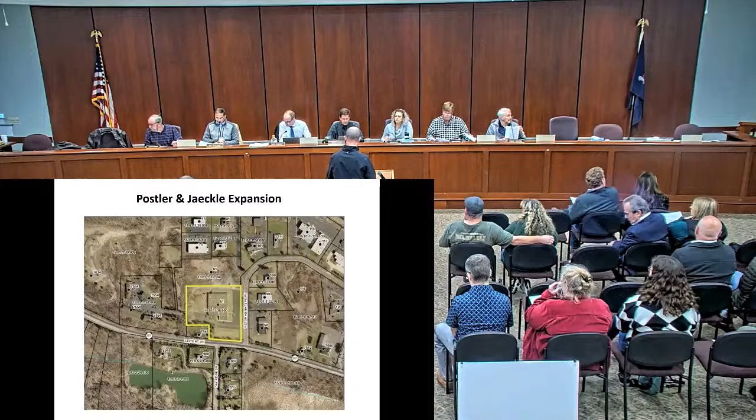So with that, the first item is Postler and Jaeckle expansion, 51 Victor Heights Parkway. Applicants are requesting approval to construct a 20,200 square foot addition to the western side of the building. Good evening. Matt Tomlinson with Marathon Engineering.

Joined by members of the developer or purchaser of the property, as well as the architecture team tonight, to answer any questions that the board may have. As mentioned, we're located at 51 Victor Heights Parkway.

There's an existing building present on the site. Interestingly, as part of the due diligence period on the property for the prospective purchaser, which is Postler and Jaeckle, for relocating some of their sheet metal and shops that are in multiple locations to this location to get it all under one roof, there was an understanding from the current owner that there was previous approvals in place for this expansion. But in research with the town, both for variances and site plan approvals, while we found some evidence of those plans having been approved in the past, there did not appear to be an approval history that went along with those plans. So we're here today requesting essentially the same approval that was shown on the previous plans, and I believe we've got a slide that shows the addition.

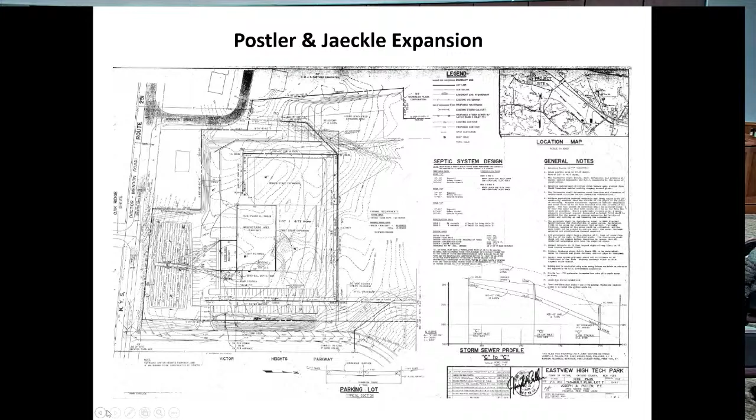So what's on the plan right there was the addition, and this is with north to the right now, sorry. So that's the west side addition that we're talking about, 20,200 square feet. The original building was here. The first addition was on the south side with a small office bump out.

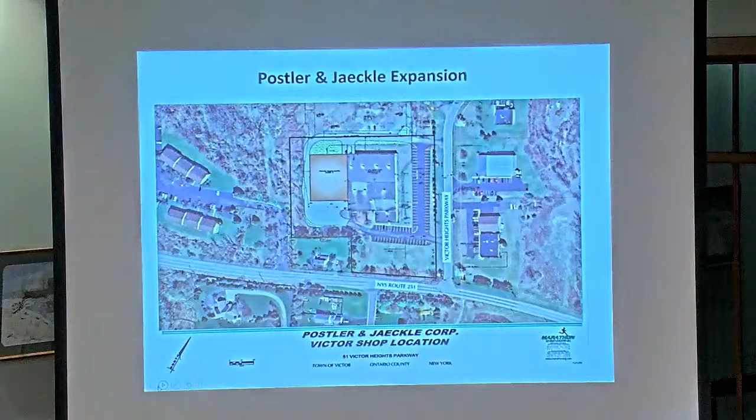If you could go to the next slide, please. Matt, the paper in front of you shows the order of the slides, so if you want, let Susie know which one.

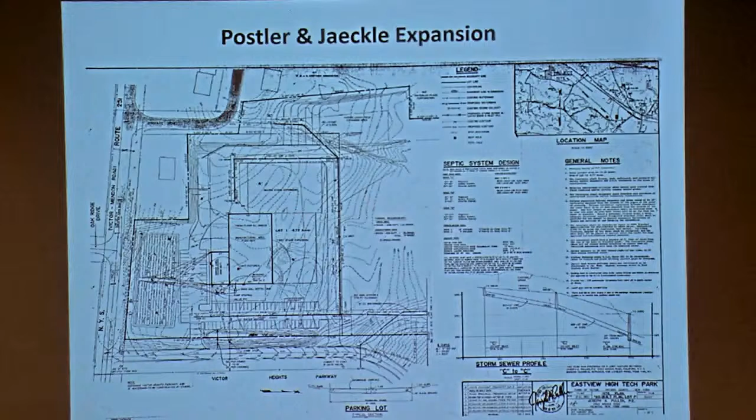Appreciate it. So this slide here is the original plan, and I believe this was dated 1991, and it shows that same, again north is to the right, the original building, the addition that was on the south with the office bump out, and then this west addition in the same location and size as what we're currently proposing.

Again, in order to kind of complete the record with the town, we were directed to make application both for site plan approval, which is what we're here for tonight, but also given the presence of residential zoning district at our southwest corner, which is only the shared property portion with the apartments immediately to our west. We also have a couple of variances. We appeared last week at the zoning board meeting to discuss those, and that is for a 100-foot buffer as well as a 100-foot setback, both of which are required within the light industrial zoning to any type of residential use.

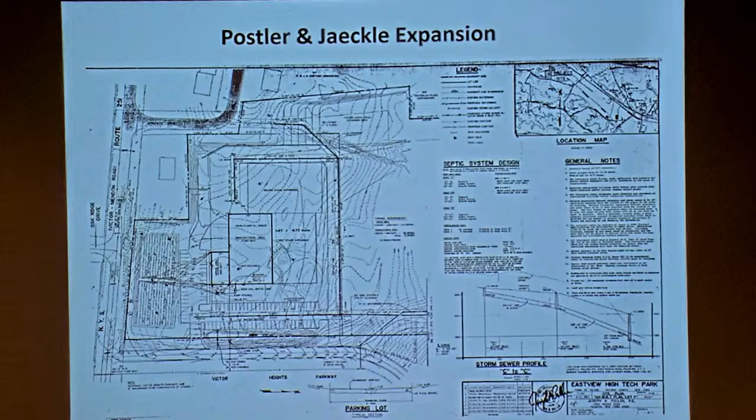Generally, all other improvements are abandonment of an on-site septic system. There's an on-site septic system along the south edge that will be abandoned along with the tank and pump system that are there now. We will connect to an existing sanitary stub that was extended to the northeast corner of the property, and then run a lateral over from our addition just to help facilitate and avoid cutting through floor slab in order to service that. There's an existing gravel loop road around the perimeter of the building, and that will be paved in accordance with town code as well for access drives within the district.

So essentially, we're looking to complete what we thought was the previously approved plan, and understand that we need to bring that up to code and get the approvals in place. We've had initial discussions with LaBella on the stormwater comment, which you'll see in the comments that we received, and are working through addressing other town comments. It's our understanding that the board cannot take action tonight because we're still waiting on Ontario County comments. That meeting's tomorrow, so we do anticipate coming back next month with comments addressed, and hopefully any questions that the board has, we can answer as well.

I believe also that the ZBA is looking at it on December 2nd, right? Correct, for their final sign-off. So that timing works out well, I think, for the board as well.

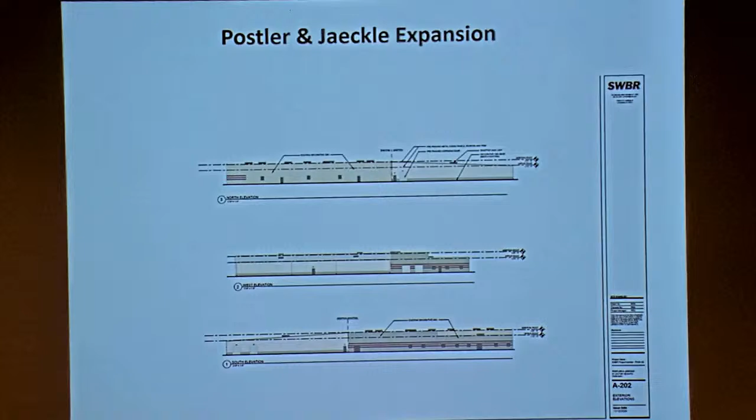We do have some slides with elevations and renderings of the building. I'd be happy to have the architect come up and explain, or we can just answer questions that the board may have, whatever your preference is. Go ahead and have the architect present, that way the public here can see as well.

Good evening, Brandel Sickler with SWBR Architects. The proposed addition will be a pre-engineered metal building addition. We will carry the existing office masonry, the decorative masonry, as a base around the building, and are proposing to use insulated metal panels for siding above that, which is consistent with many of the other buildings in this development. There will be no windows, only exit doors and several loading docks for openings. And that's about it, it's a rectangular addition, pretty simple.

Which face are we looking at with the loading dock? Which, east, north?

That is a grade level door, replacing one that is just inside that is covered up by the addition. That is the north side of the building. You're looking at orientation on your images there.

I did neglect to mention, and this was a question that the zoning board brought up, relative to the use of the building and its operations. There's some questions about noise. It is a relocation of their sheet metal shop, essentially. The addition will hold stock and have some spiral machines that operate, which are not noise generating. Any type of stamping will be as far within the building, away from the residential side, as possible. Primarily it's putting together ductwork before it ships out to their jobs.

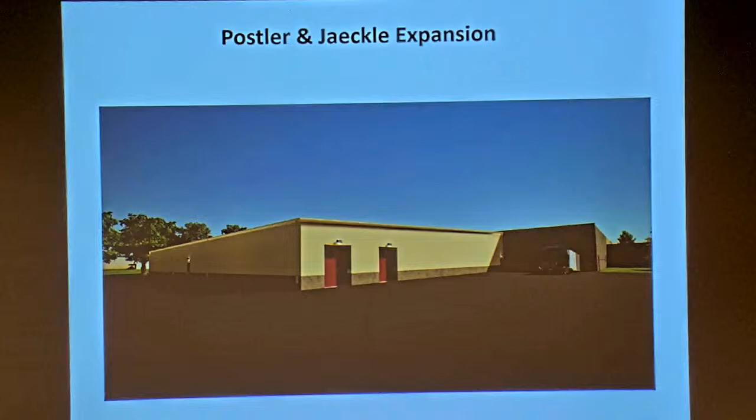Okay, great, thank you. Anything else, Matt, before I open it up? That's it. Any questions you guys have, we'd be happy to answer.

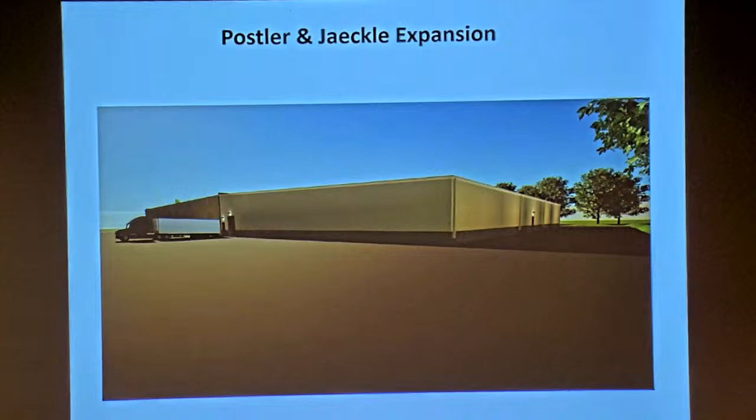Okay, Wes, from LaBella's perspective, anything about this site addition that you're concerned about, or have they answered? I don't feel like we have any showstoppers. We did release a comment letter today dated November 12th. Comment number one is about the short EAF Part 1, which lists a 17,000 square foot addition. We just note that the copy the town keeps for their record should note 20,200 square feet.

There is a somewhat steep slope on the west side of the building, I believe, very small in area, a one-on-one slope. The applicant proposes an erosion control blanket. We want them to specify the specific type of erosion control blanket, and provide some verification that the slope will maintain its stability over the long term.

It looks like we're going to work with the applicant on any stormwater management concerns for water quality treatment, as they do trigger the Irondequoit Creek watershed packet for developers' thresholds.

The landscape buffer comment we indicated in number 4: the code says whenever a permitted use in the district is located adjacent to any other district, a fully landscaped buffer shall be provided along the full length of the adjacent district. A 100-foot buffer shall be required adjacent to a residential district. So it sounds like that may be partially addressed with the Zoning Board of Appeals if they provide that variance. I'll defer to the Planning Board as to whether you want to see any additional landscaping in that area on the site plan.

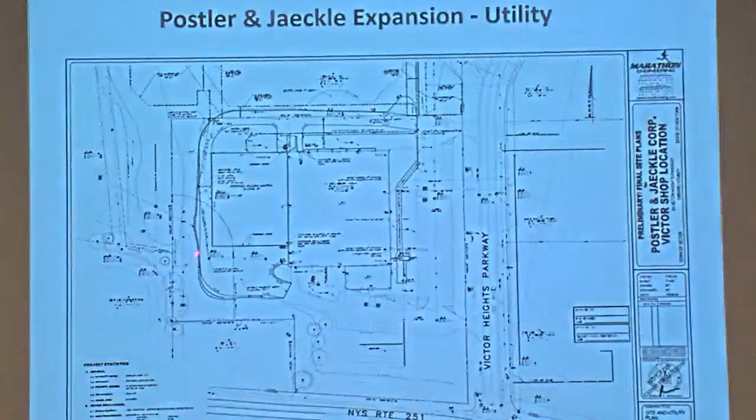Right there. I apologize that it's pretty small, but right here in this corner, that's the existing gravel edge, and we're leaving all the vegetation that exists today from there to the residential. So no change to what's out there today.

And again, there's about 12 feet in grade change with us being lower from the point on the pavement—sorry for my shaky hand—and the driveway for the residential immediately to our west. All right, thank you. Okay, now thanks.

Scott? I just had a couple of questions. What are the intended hours of operation? I'll have John speak to that. Yeah, we generally work with the field hours, 7 to 3:30. Weekends or? No, not generally.

Okay. The other question I had is I noticed on the drawing that the driveway on the north side goes onto the adjoining property. Is that correct? That's correct.

And is that going to be reconciled by some sort of easement? There's an existing cross-access easement, and I believe within the contract they're purchasing that north property as well, so it'll be common ownership. Okay, so you're not going to show an easement then?

I see a sanitary easement going through there, but you're not going to show one between the two parcels. We need to clarify whether the cross-access easement covers that, but regardless, we will have common ownership, and we will establish it if necessary. All right, that's all I have.

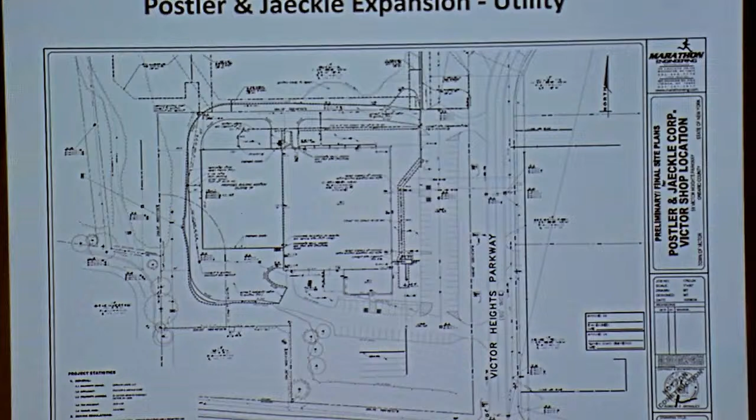Okay, this is a public hearing. I will open it up to the public if anyone is interested, with questions or comments for this application. Now's the time.

Seeing or hearing none, I'll entertain a motion to close the public hearing. I'll move. Second. Ernie seconds, Al moves, all in favor?

Aye. Okay, there's really very little left to do between now and the next meeting, so I think that makes sense. We can move on to the next application. Thank you.

James, before you get going, I'm going to give Marshall Hardy an opportunity if he wishes to go next. Would you like to go next, Marshall? Yep. I'm going to move up your application.

This is number 5, a final application. We've seen this application a number of times. I believe it's pretty straightforward. It's not a public hearing, and he's requesting approval of the subdivision of a 36.3 acre parcel into 2 lots, with the existing home located on Lot R1, 9.5 acres. Sorry, Susie, I'm a little out of order, but thank you.

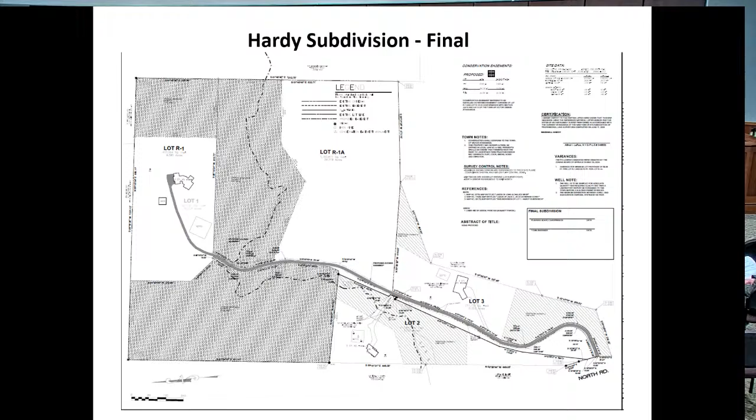Thank you. Ernie? Well, this is about the 3rd time I think we've seen this, so I have no further questions. Okay, so if there are any outstanding issues, Wes? Yeah, our November 7th letter has just 2 comments in there. The applicant has addressed them, or is working on addressing them, so we have no further comments.

Okay, thank you. As do I. I think we're pretty satisfied with all the things you've been able to do, and wish you good fortune on making your new home, and welcome that. Thank you. Okay, we do have a resolution for approval.

Go ahead and read this. For the Hardy subdivision, 7590 North Road, whereas the planning board made the following findings of fact, and there are 10 of them: resolved that the project Hardy subdivision will not have a significant impact on the environment and hereby issues a negative declaration. And be it further resolved that the planning board hereby issues a waiver to section 2915 of the town's design and construction standards to allow for a total of 4 lots to be served by a common driveway, whereas the standards would otherwise require no more than 3 lots to be served by a common driveway. Now therefore be it resolved that the final subdivision application of Marshall Hardy be approved with the following conditions.

Conditions to be addressed prior to the chairman's signature on the site plan: 1, 2, and 4 are all standard, and number 3 is that the comments in the letter dated November 7th, 2024 from Labella Associates be addressed. Ongoing conditions, numbers 1, 2, and all 4 of them are standard conditions. And be it further resolved that the planning board secretary distribute the planning board's approval letter.

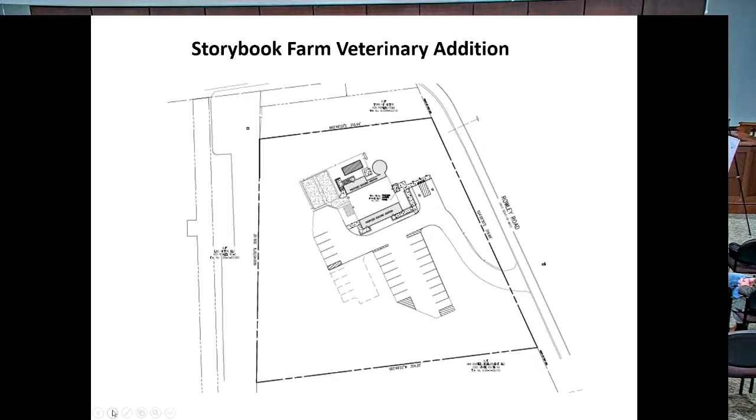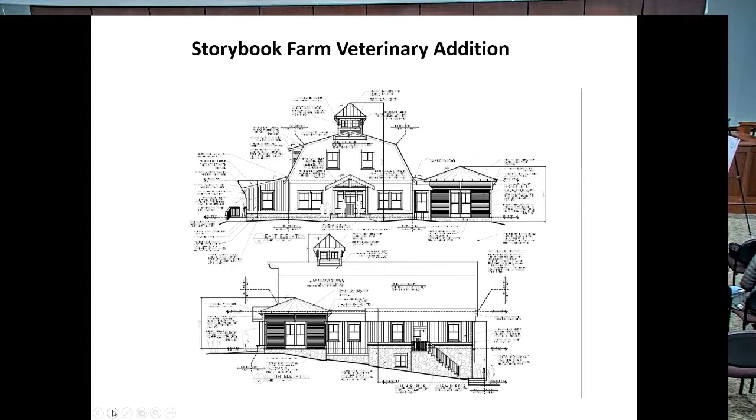We were in front of the ZBA last week for a front setback variance. One of the building additions includes a front entrance canopy that is going to basically push into the setback about 6 or 7 feet, so we're asking for like an 8 or 9% relief on that.

Same thing with what we'll call the silo feature of the addition, something that kind of fits in with the barn architecture. This also clips over the front setback by a couple feet, but a little bit less than the front entrance canopy.

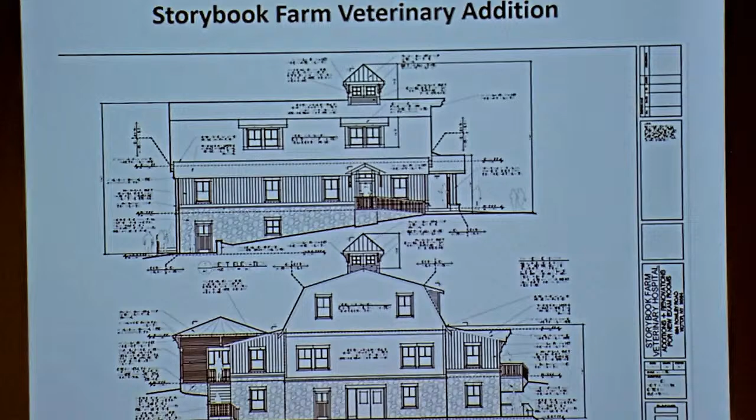So this is the parking lot side that you see when you enter, as well as the rear side that abuts some town-owned land where that little cemetery sits on the corner. On the north side of our property, there's an existing fence with some kennel structures in the rear.

We're not touching that fence. That's going to remain. We are going to be relocating one of the kennels within those limits. With the building addition, we need to push it back to get it out of the way.

You can kind of see right here, that's basically this little—darker color. If you wouldn't mind, anyone who's applying, please point to that screen because Susie takes that camera and aims it at it. So if you're using a laser.

So the fence isn't shown here, but this is the north elevation. Basically the fence comes out like this. Right now there's one of those kennel structures here, and we're just going to kick it out, but keep that fence line the same.

The rest of the kennels, we're not touching anything in the back there. The building additions are going to expand the space for visitors as well as staff. They are a very successful veterinary office, one of the few that are in Victor still, so with their growing need, they just want more space in their facility.

We did consider a separate building at one point, but this made the most sense economically for them and their business operations. Today they run about 4 exam rooms regularly, depending on the number of doctors they have there. With this addition, they're going to expand it to 6, but I think they'll still run primarily 4 regularly. The 2 extra are just going to be excess if they need it.

They're also going to expand some of the break rooms, back of house areas, surgery areas, and just make the space a little bit more amenable to the visitors and the staff.

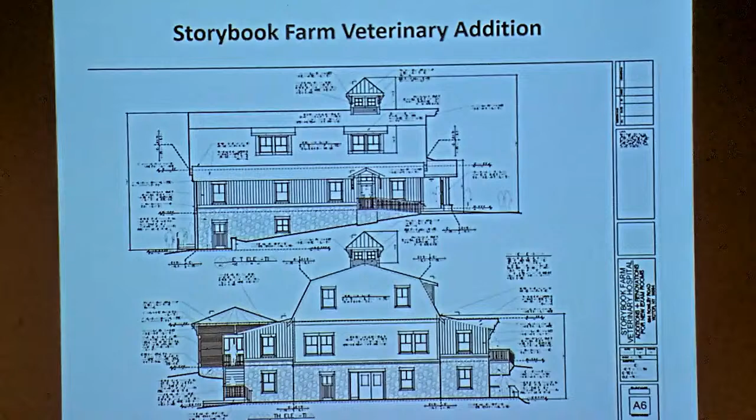The reason for this is because if you've ever been to the site today, the driveway comes in around 10% and it continues that to the parking area. Even the parking area is not ADA compliant for slopes today. So by allowing us to build the 2 parking spaces in the front here, it really keeps our saw cut and limits of disturbance to this whole parking lot very minimized.

Whereas if we were trying to force the ADA spots here, we would more or less be taking out that whole parking lot to regrade it, to bring it into compliance. So this makes a lot of sense from a functionality standpoint.

It does give us a couple extra parking spaces, especially for disabled people. It gets them right close to the front door. If they're carrying a carrier, this will make it a lot shorter of a distance and a lot more manageable with appropriate slopes and ramps and things of that nature.

We're not proposing any landscaping at this point. The only thing we're taking out with the building addition and site work is the foundation plantings. We do have intent to replace the foundation plantings. However, I think the final color and materials of the building haven't been selected, so we're waiting to do all that in conjunction.

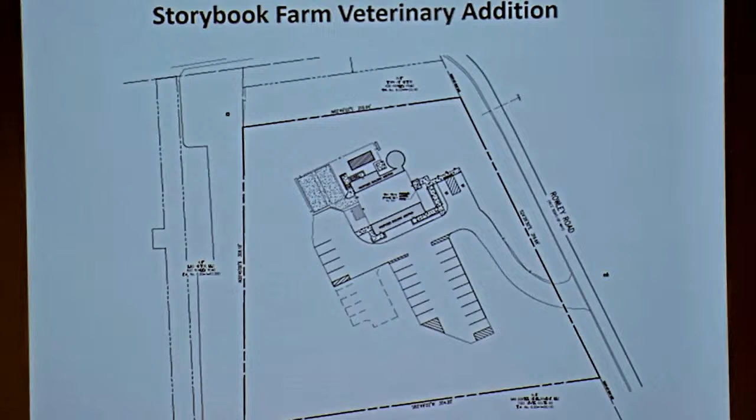So you are correct, the county has it, so we don't have that approval yet. And ZBA also on December 2nd for your setbacks, correct? So with that, I'll open up questions from the board.

Ernie, I'll start with you. Mix it up, since nobody's asked my questions yet, I'll go. Yeah, right.

Am I looking at an outdoor section here for the animals? It's all existing today — there's existing outdoor kennels today. They don't offer any kenneling services to the public. They're mainly used to house and transfer dogs based on internal shuffling. They do offer space for employees' animals though — if you bring your dog to work, they allow some of those. But in terms of kenneling, that isn't part of their business anymore.

Well, I only ask because once in a while I'm down in that area and I can hear the dogs barking. Is there some way to minimize that? It was a service they used to offer to patrons, kenneling, but it's not something they offer anymore. It's really just an amenity now.

In terms of neighbors, I don't really think there's anybody we're impacting with the location of this. I don't think there is either, but I can hear it from down by the bank below. Okay. We'll discuss it with them and see if there's any noise mitigation issues, and we'll try to nail down exactly what the full use of those kennels is to come back and explain to you guys at the next meeting.

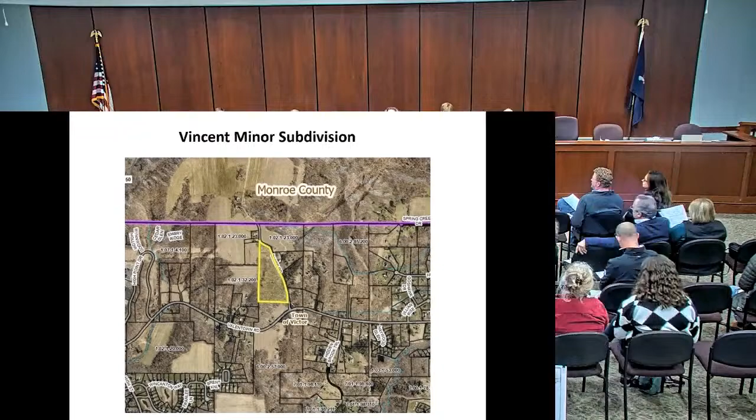Next application, the Vincent Minor subdivision. The owner is Christopher Vincent. Applicant is requesting approval to subdivide a 20.414 acre parcel into 2 lots. This is at 104 Baker Road. Lot 1 will consist of an existing home with 18.345 acres, and Lot 2 will consist of 2.069 acres.

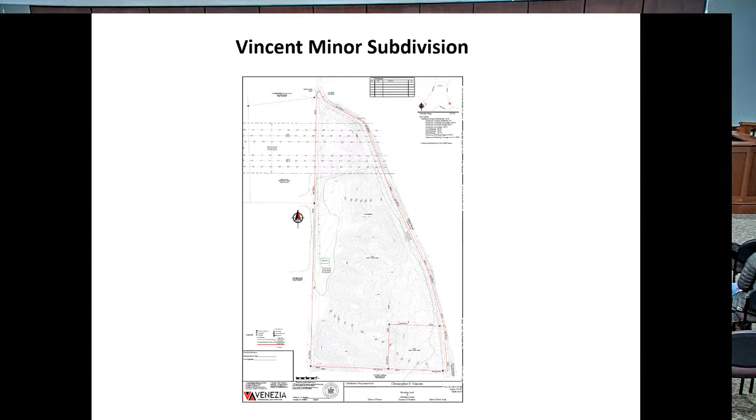Applicant here for that? Come on up. Hello, my name's Chris Vincent. I plan to sell or subdivide 2.069 acres on my current 20.414 acre lot. It would be on the bottom, the south end corner, right on Valentown Road and Baker Road where they meet. There is a laser pointer if you'd like to use it. Sure.

Right here, so here's Baker Road. Comes all the way up and turns into Thayer. And right down here, there's a cornfield, approximately 4 to 5 acres. Valentown Road goes right through it. There is a house on this lot now, up at the northerly end - that's the current house, but the driveway goes north, correct? Yep, the driveway comes up right where Baker Road and Thayer meet.

Okay, so just for orientation, for everyone's sake, there's a lot of relief here. Yeah, there's a lot of leaf up there, a lot of wind, a lot of leaf. Most of it is wooded? Yeah, right up here is another parcel that's 6.6 acre cornfields that we own as well. You can see the power lines coming up through on this side, and all of this is wooded. There's basically 3 big ridgebacks that come through there. Okay.

Questions for the board? Want to start again, Ernie? No, I don't have anything on this one. Okay, it's pretty straightforward, giving you an opportunity.

Go ahead, Scott. I guess I assume that the lot being subdivided is conforming with all the zoning requirements in terms of area, size, width, depth, all that. Yeah, as per your assumption, Labella checks code enforcement for that.

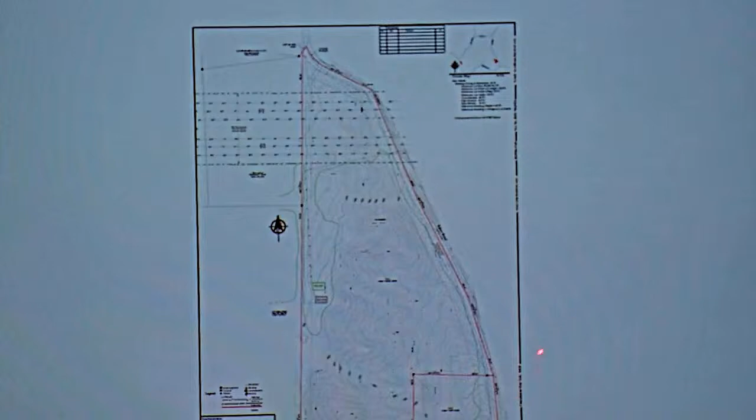Yeah, I will say there are three other owners on the other side of the road. One of the driveways is basically about right here, and then the other is right here. There's already properties on the other side of Baker Road with driveways in.

Yeah, part of the conversation is about, I don't know if there's sewer here. No. So you'd have to have, if you're going to sell it as a lot, that person is then going to have to come before the board, correct, make sure that it's a buildable lot, and prove that with engineering.

And we'll get to you in a minute, Ron. And also that the slopes work. So there's a host of things that we generally look at when we subdivide a lot, just to make sure, for your protection as much as anyone's.

Sure. So there's going to be a parcel out there that hasn't been shown to be able to be approved as a buildable lot until such time as the engineering comes through. So that'll be a risk that someone who buys that lot takes. Okay, just want to make sure that's clear.

Yeah, absolutely. So, Al, questions? Well, I think that's really the one and only concern, so. Okay, Joe? Nope. Okay, I think I've kind of said my piece. I know that Ron's here, Ron Santola, I just happen to know him professionally.

Did you have something you wanted to address, Ron? Just come up to the mic and identify yourself for the record.

First of all, when I drove into the village of Victor tonight, it brought back a lot of memories, because all those streets were designed by a firm and myself that I worked on many years ago, and it's good to see they're still in good shape. I'm a registered professional engineer, I work for Approved Engineering. Prior to that, I worked for the city of Rochester, Monroe County, and I've got numerous projects under my belt. Chris is going to be my future son-in-law, and this is my stepdaughter over here and my wife. We are looking forward to building a house in Victor, and when he offered me the opportunity to buy a couple acres, I jumped at it and said yes.

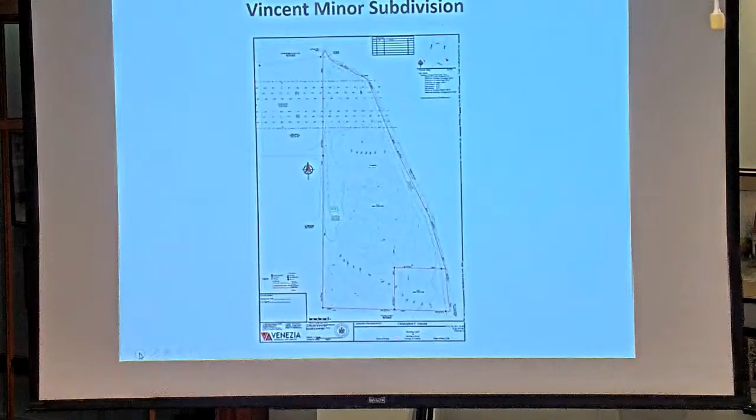If you can point to the lower right-hand corner where the red line is. The laser up there, Ron. You have a laser there for your use. There we go. Try the other screen, though. Point that one. Which one? This is the parcel that we're looking at buying right here.

The driveway is going to come right off right here, and then the driveway is probably going to come up. The house is going to be located someplace in this area. I don't want to have it up here because it's too hard to get up the top of that hill, but I want to be far enough away from Valentown Road so I don't hear the road noise. So my guess, based on the contours, I don't like the contours they got, but I want to have this...

I already put a request in for the survey, to give me a better survey of this area, and also to give me the grading of that stream, because I'm probably going to line the back of that stream with heavy riprap. I don't know if you've ever been out to Hilton, but there's a beautiful house out there with huge pieces of slab rock, and I'm trying to find out where they bought that, because I'd like to line that ditch and have it all matted so that it's not going to erode in the future. I've got pictures I can show you on my cell phone, but I want to do it right. I don't want to put a driveway up there and have it come apart in future years.

Ernie, anything else? I guess not for now. Well, obviously, your eyes are wide open when you're looking at the site, knowing what the constraints are, knowing that's going to be a risk that you're taking to not have it all engineered out before you take on these property lines, as Scott was saying. So, from my perspective, I don't see an issue other than what's been mentioned to providing the subdivision opportunity now.

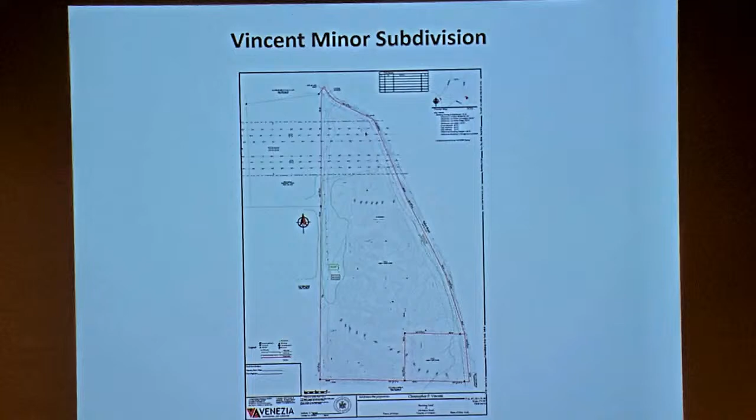But it is a public hearing, so I would like to open it up if there's anyone, residents in the area, neighbors, that have any questions for the applicant. Yes. Name and address, please. David Palmer, Valentine Road.

It's a swamp, it's wetlands. Can you, on that property? That we're talking about? There's lots of that's all wetlands. Chris, water supply is from that wetlands. Years ago, a couple of years ago, I was standing here, and Valentine Meadows development, they had to stay so many feet away from those creeks. He couldn't even go over the creek. This gentleman's going to be going over the creek.

How does that work? Is this a Blue Line Creek, Ron? Can I answer that question? Because I disagree with this assessment. Oh, hang on, we can't talk without you being in front of the microphone. So you're welcome to continue any thoughts you had, if you want Ron to answer that question. Valentine Meadows had to stay away from the creek. They couldn't even put a sluiceway, a culvert in, to move that one driveway.

And this gentleman's going to go over that creek. I don't see that. Look at how water flows on this map - east, it isn't shown, but Valentine Meadows flows west. Is that a difference?

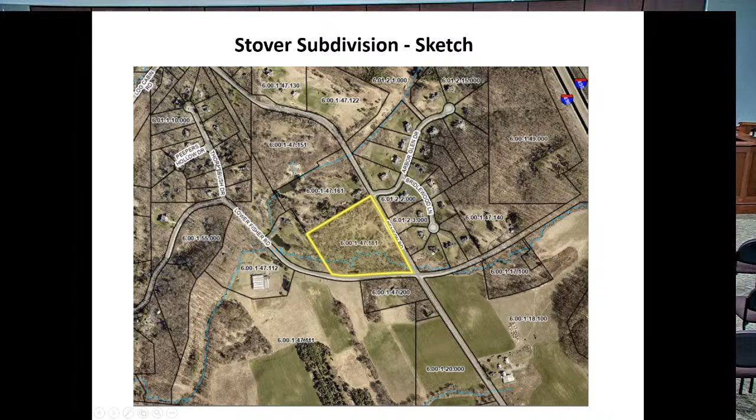Good evening. I'm Steve Schultz with MRB Group, here tonight with Todd Stover, the property owner and applicant. He intends to subdivide his 11.6 acre parcel at the northwest corner of Lower Fishers and Benson Road into 3 residential lots. The zoning of the property is limited development district, and 1 acre lots are permitted as public water is present along the east side of Benson Road.

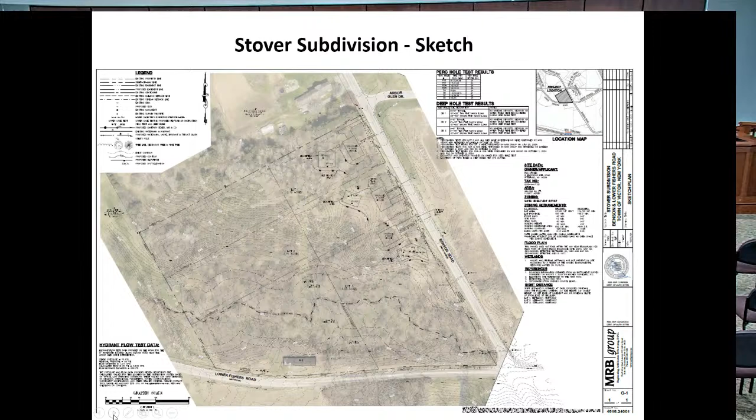So each lot will have a water service and a septic system. The areas respectively are Lot 1, 2.76 acres; Lot 2, 2.75; and Lot 3, 6.08. We've done perc tests on all the lots and deep holes, all witnessed by a representative of LaBella, and we're all within acceptable limits, ranging from probably 10 to 45 minutes or so, after running 3 or 4 times - they were all pre-soaked.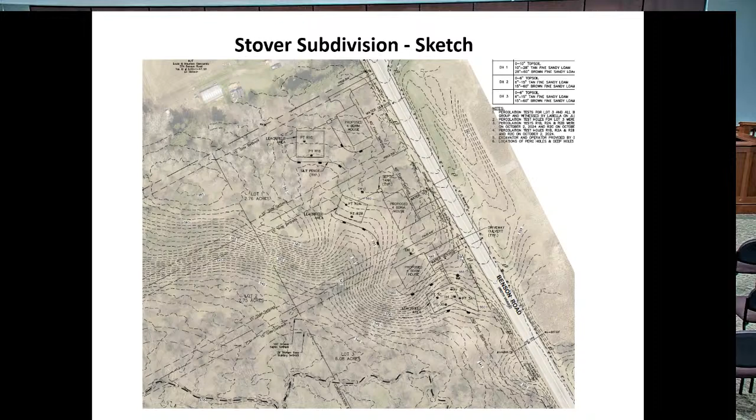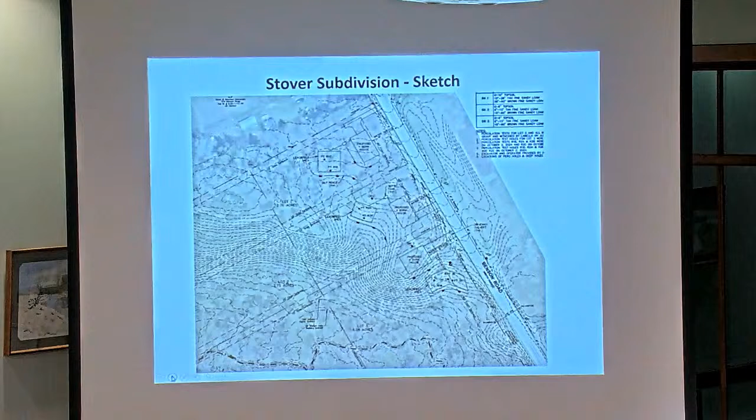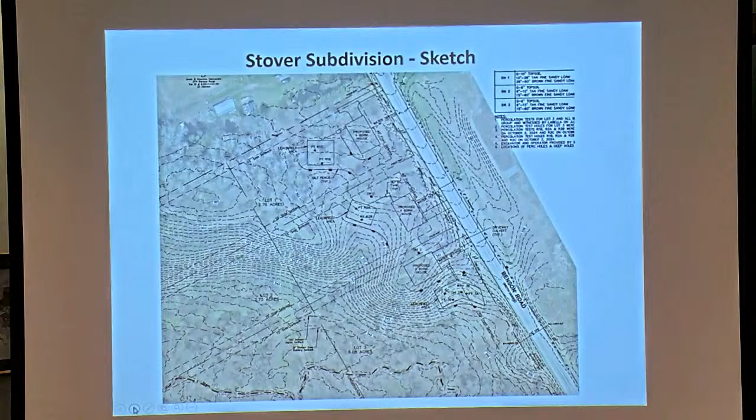So we'll use those with a 4-bedroom house, and the rough representative areas are shown on the plan as to the size of the septic system that'll be needed. We do have a conservation easement proposed on the west side of the property that makes up 50% of the property as required by code. You can't see it on this plan, but the larger lot on the south end here is 6.1 acres, and there's an existing Quonset hut type shed along Lower Fishers Road that we intend to keep on the property.

Susie, can you go backwards 1 slide? There you go, thank you. Yeah, right in here. There you go.

It has a small driveway right off of Lower Fishers, so that'll be maintained. There's a small stream that cuts through this lower lot, which is another reason why it's so large. There are setbacks associated with that, as we found out during our pre-application meeting - 75 feet for any buildings and 100 feet for septic. We're out of those limits there, which is why we created the larger lot. All the homes will be off Benson Road, all driveways off Benson Road.

What's the intent with the barn, that shed there? Is that to maintain it, retain it? Yep, he plans to keep it, and it was kind of run down. He's fixed it up nicely. It looks really, really good now, and uses it to store his small tractor and some other gardening type stuff. Okay, thanks.

We have received some conceptual comments from LaBella and town staff, and I think the one that was kind of running between all of them was the conservation easement, and to kind of eliminate the Quonset hut from consideration of the area for the easement. We have plenty of space to do that. Okay, well, on that note, Wes, any other things, or do you want to comment on this?

I'm familiar with this property because I did a concept on it for a prior owner, so this was kind of a deja vu when I looked at it. I think you have it laid out in a very similar way to how I had it laid out. I guess the question I had was concerning the conservation easement, and if the board is asking the engineer to change the configuration of the conservation easement so as to enable that building along Lower Fisher Road, or if there's something else the board wants the engineer to do.

I think it's more a question on how they're approaching the layout, because it looks like if you go along Lower Fisher's Road, there's no space other than where that shed is, to put a house. Right? Because everything else is like, I'll call it wetlands, but it's a buffer for the stream. You can't really put anything down there. You've got, well, if you take the setback, the Quonset hut is encroaching on the setback, and then the stream buffer. This whole area, that's a big wide swath, right? You can't really do anything with it.

Well, I didn't know if it was in the conservation easement or not, it seems to me the 75-foot buffer each way of the tributary, that's effectively a conservation easement. Yeah, we could have our conservation easement follow that.

The only thing kind of difficult about it is you have to monument those, that makes it a little complicated if it zigs and zags a lot. You could make some straight lines if you wanted to, I suppose, so it wouldn't truly follow exactly the 75 feet, but it could be close. You could do some chords, 2 or 3 chords, not a lot, and make it easier for everyone to enforce and/or help monitor.

We had that site once before, as I recall, remember? The one on Mountain Hill? No, zigzagging everywhere, it's crazy.

I just wasn't sure if the Quonset hut can be in it, but you just exclude the amount of area that's impervious, and as long as you have enough buffer around it, have the building plus 25 feet or something around it. I mean, we could go around it with the easement. Do they have to reconfigure the conservation easement to kind of go around that thing if it's not allowed to be in a conservation easement? Yeah, okay, yeah, we can do that.

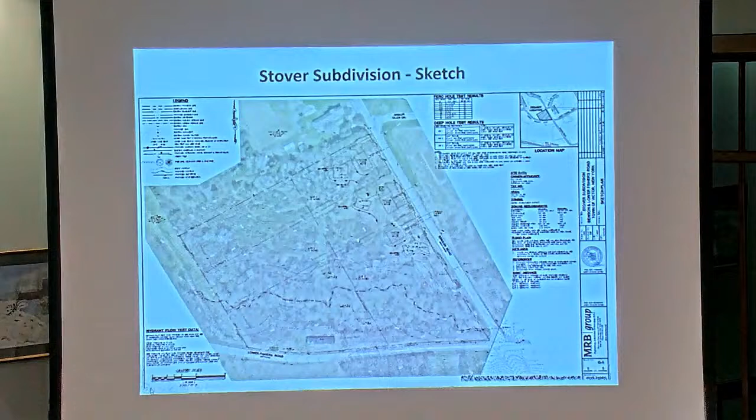That was the surveyor's question. I mean, you could do a conservation easement that starts from one corner and goes straight over there, for instance. That kind of constricts the third lot to a major piece of conservation easement, so that doesn't help you much. But you certainly have to include that Quonset hut, right?

So, I think I'm hearing we're open to, if you want to make some configuration adjustments, make some changes to make some adjustments. Yep, we can do that.

The goal with this was to keep everything up closer to Benson Road and leave this open, and your contours kind of run this curve anyway, so that's the way to do it with the conservation easement. You don't have to go diagonal, exactly, pick a couple of points and define it.

And if it's more convenient for you, the more usable land, for instance, there's a knob right here, I think, that I'm looking at on my computer, so I can see that, but right now it's partly in the conservation easement. Do you really want it in the conservation easement, or can that be usable land, or a playground set or so, who knows? Maybe you want to just take a look at it with respect to the conservation easement, what is allowed to be done in it.

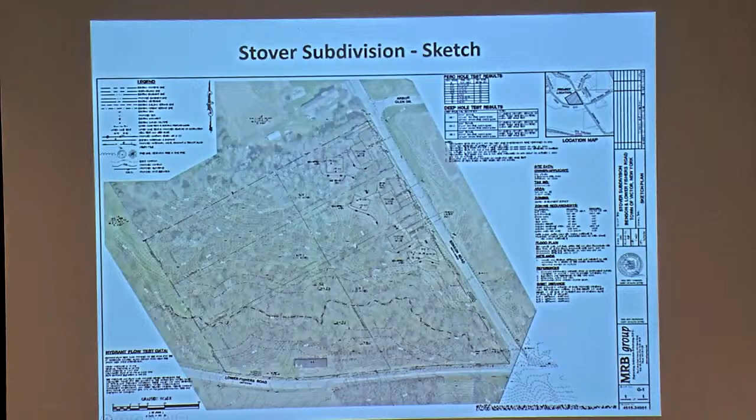It depends on the nature of the conservation easement. You can have a totally restrictive conservation easement you can't even touch, but there are conservation easements where you can mow the lawn. It's just that nothing can be built. Is it going to be something required for this subdivision that you can't touch, or is it not? Good question, what do you want?

Well, again, we can make it site-specific and define it. Have you visited the conservation board? Have they been before the conservation board? Please state your name. Sure, hi, I'm Todd Stover, I'm the property owner.

I didn't have a specific plan on that. The intent is to subdivide and basically sell, so for some of this discussion, I feel like that's the next person who's looking to buy it - some of that's their idea. Well, we do have to define the conservation easements before you're able to subdivide and sell the lot, so they know what the conservation easement limitations are.

So you certainly don't want to hem in one property in favor of another one, right? We're just trying to work with you a little bit to see if you care to have more flexibility with Lot 1 than you have right now, and there would be some trade-off there for Lot 3, but Lot 3 has got a ton of land on it. I think that what you've said is acceptable. As Steve said, this is a first pass at the idea, so there is some wiggle room on my part.

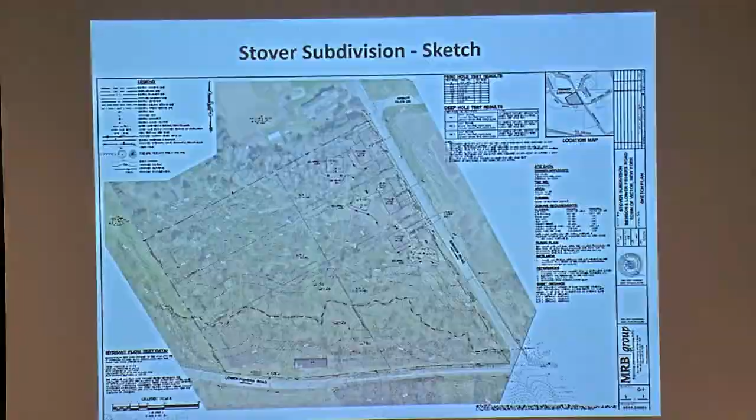So with that, I have a resolution for a complete sketch plan application. It by no means is an approval of the plan - it's basically that the application has everything we need to move forward. Whereas the planning board made the following findings of fact, there are 8 of them, now therefore be it resolved that regarding the sketch plan application of Todd Stover, major subdivision entitled Stover Subdivision, the planning board acknowledges receipt of a complete sketch plat application, and be it further resolved that the planning board secretary forward a copy of this resolution to the applicant.

Motion for approval? Move it, second. Now moves, Ernie seconds. All in favor? Aye. Carried 5-0. Okay, thank you, on to the next step. You're welcome.

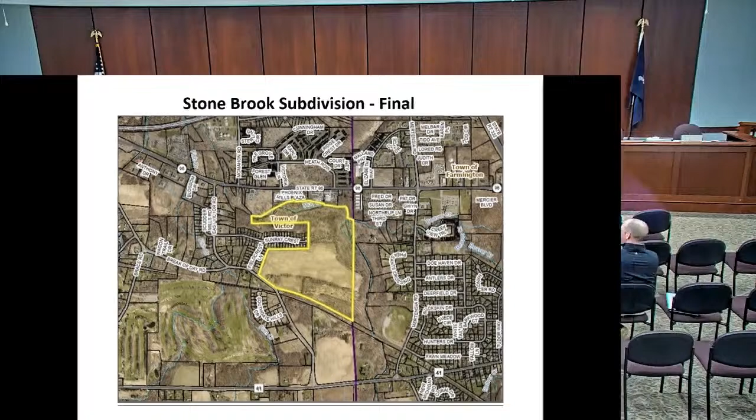Stone Brook subdivision is the next one. This is also not a public hearing. 1403 East Victor Road, owner Woodstone Custom Homes. Applicants requesting approval to create a clustered subdivision of 44 buildable lots on 100 acres in the town of Victor, with 15-plus acres in the town of Farmington for a total of 115 acres. This would be Section 1 of a 2-phase development, and the 3rd step in a 3-step process for a major subdivision. Preliminary plan was acknowledged complete September 27th, 2022.

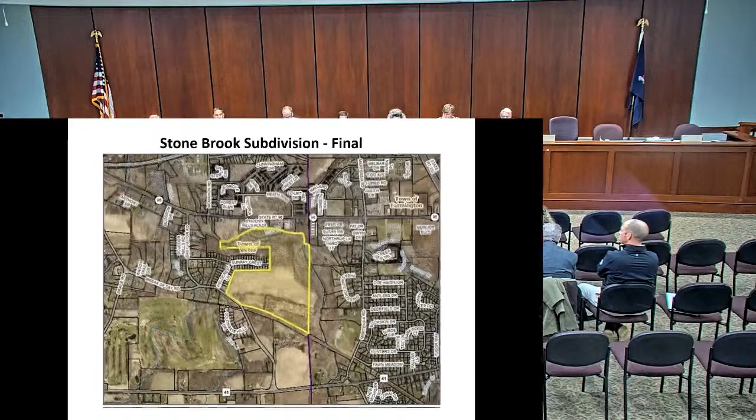So it's been a couple of years since we've seen this, but you have, and it's an interesting application, quite large. But good evening, good evening.

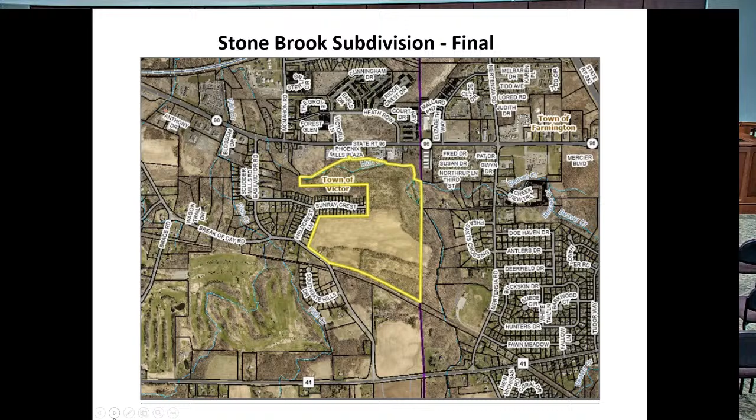Mr. Chairman, members of the board, my name is Cole Papasergi with Marathon Engineering. With me today is the development team, Jeff Smith and Tim Smith from Woodstone. We're here today requesting final Section 1 subdivision approval for Stone Brook subdivision.

As mentioned, it's been a while since you've last seen this. This was given preliminary overall approval back in 2022 as part of a Town Law 278 for 85 lots. This is a 115 acre plus or minus development, with part of it being in the town of Victor and a small portion of it being in the town of Farmington.

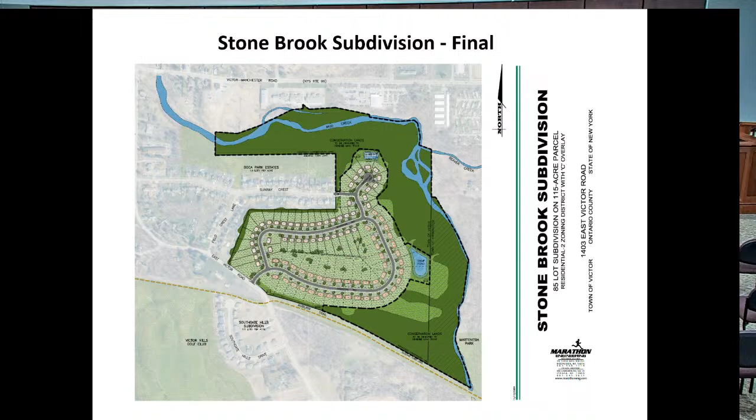Section 1 of this development will be 44 lots, and it will have access over on East Victor Road, which this is. So the whole subdivision is located east of East Victor Road and to the southwest of Mud Creek. It is also bordered by Auburn Trail to the south, and Boca Estates subdivision to the west.

It will have access off of East Victor Road and Sunray Crest, and there will be sidewalks on just one side of the roadway. As part of preliminary overall, additional sidewalk was added in a couple spots up by the north side of Sunray Crest and connecting to Fieldcrest.

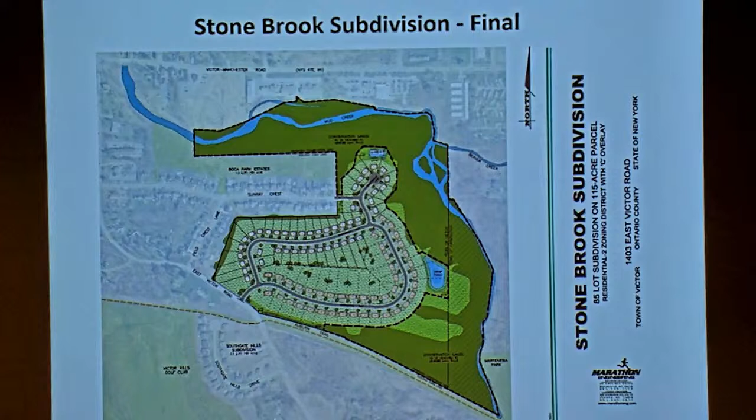I'm going to just give a brief overview of the project since it's been so long. As part of market conditions and economic factors, there's been a pause, but here before you today, ready to have this approved.

For Section 1 of Stone Brook, will just be this portion here. During preliminary overall and earlier phases of the project, it was identified that traffic was a concern by the residents and the board regarding traffic going through the subdivision. So roadway reconfiguration happened to better design the subdivision to have residents flow to East Victor Road rather than through the subdivision to the west.

Additionally, drainage was a big concern for the board at that stage, for the back units of Boca Estates. So we are designing the subdivision as a whole to mimic existing conditions. There was previously a portion of the drainage basin that would drain to Boca Estates, and we are picking up a large majority of that and draining it to our stormwater management, which will greatly reduce the drainage impacts over to that neighboring subdivision. Can you identify the stormwater management area?

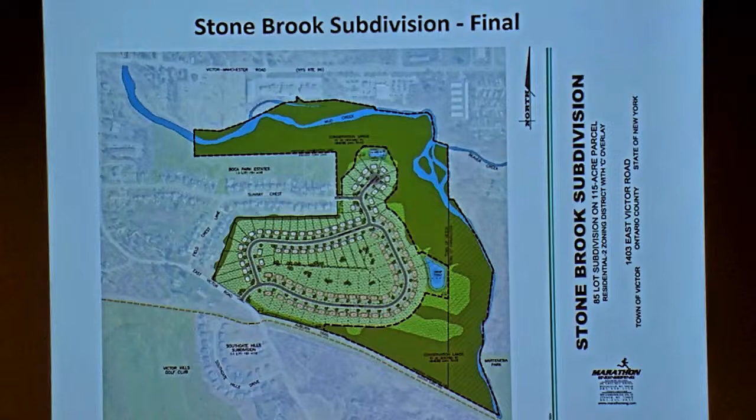I guess regarding the land trust, is that pretty much a given? You indicated there was a memo of understanding - is that the first step to some type of final agreement, transfer? How does that work? I can have Jeff talk a little bit more about that. He's been working through that process.

Good evening, Jeff Smith with Woodstone Custom Homes. Lisa was to distribute some materials from GLT. There has been a board resolution that they will accept the property. About the only terms we need to meet along the way - we've already done a phase one environmental, but they will also want the proper deed prepared. They've proposed, essentially, a memorandum of understanding that states their intentions and what their limitations would be in terms of utilization of the property. Their memorandum is principally between us and the Victor Hiking Trails, and they are soliciting the cooperation of Victor Hiking Trails to develop some trails on the property.

But they've also said in that memorandum that their acceptance of the property is not contingent upon their agreement with Victor Hiking Trails. They've reviewed it, the board's accepted it. We will have to go through all the details in order for them to accept the donation, but they have all the materials from this report. We've also provided them the details. There was a little bit of mass grading on the fringe of their property, which we've shown them, because they had to understand that it wasn't entirely - although it's 99.9% unadulterated - there's a fringe in section 2 that will be graded as part of section 1 mass grading. But they've been very supportive of the project.

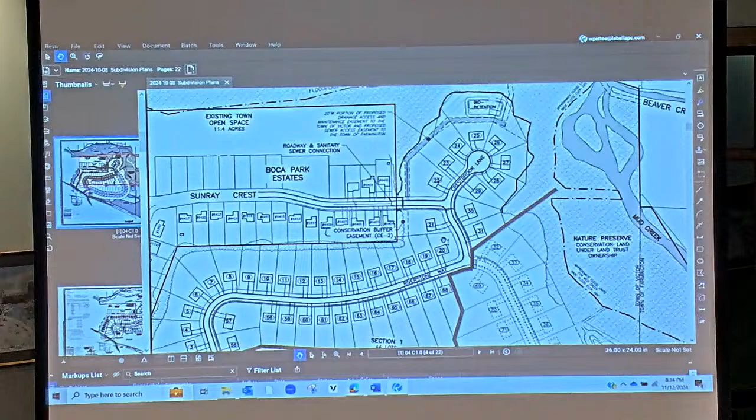Wes is going to bring it up on the screen. It'd be helpful if you could show the existing plan rather than a rendering. Oh, that might help. There we go, Wes's magic plug here. Maybe it just needs a second to recover. There we go, I'm on sheet 20 - can you zoom in on that, 4 of 22? I'll zoom in here.

So here, Sunray Crest is an existing roadway, which terminates today at this location. You can see that - that's the hammerhead turnaround Joe was asking about, right there, where the existing turnaround is for the school buses or whatnot. The existing end of the road is about in this location.

So what the applicant is proposing - currently there are sidewalks on both sides of Sunray Crest. They're proposing to extend the sidewalk on the south side all the way to the new road, Crestbrook Lane. And the north sidewalk would extend into their new development area, but then have a crosswalk at this location. I think this was agreed upon by the planning board during the preliminary subdivision phase, but our recommendation would be to carry this sidewalk all the way here and either put the crosswalk at the intersection or here.

I'm not sure what would be the best location, but I don't know that the mid-block crossing here is what we would recommend. I would discourage a mid-block crossing personally, and whether it crosses across Sunray at the intersection, or crosses over Crestbrook to the other sidewalk, maybe you don't need two crossings.

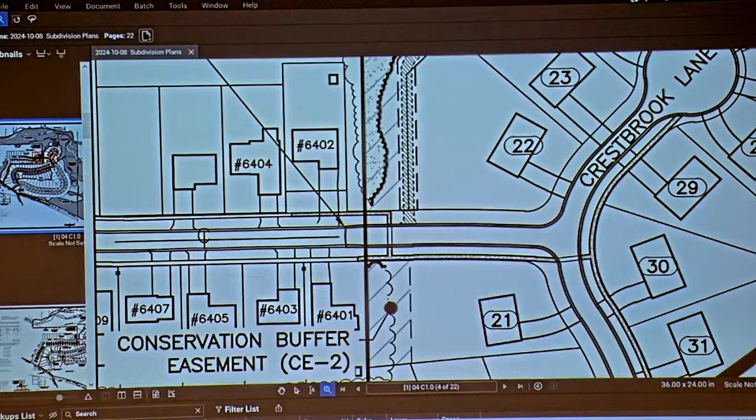So the planning board may need to decide whether you want to see an actual landscaping plan or whether you want to waive that requirement.

And then the conservation easement — I appreciate the conversation that's been had thus far about the conservation easement versus lands to be conveyed to the Genesee Land Trust. When I was looking at the subdivision plans, it was difficult for me to identify, just from the plan sheets themselves, which land was going to be conveyed to the Genesee Land Trust versus what was a proposed conservation easement to the town of Victor.

Wes, we agree, the plans are confusing, and we will make it clear. One of the confusing aspects is that on the GLT land, there wouldn't be a conservation easement, because it's a nonprofit land conservation trust, so that was clearly confusing on the plans.

As Cole said earlier, there are some very small areas, one within the stormwater management facilities, because Genesee didn't want to accept those easements and have it on their property. So those are within private ownership, and there would be conservation easements on any lots that are under private ownership. That's helpful, thank you. So that'll all be relabeled and made clear.

All right, and that takes me — I'll jump ahead in my comment letter here to number 7, the conservation easement markers. We were thinking that maybe some additional coordination might be required with the Genesee Land Trust, which gets to our fellow planning board member Joe's question about marker for lands — identifying lands so people know when they're entering the lands of the Genesee Land Trust.

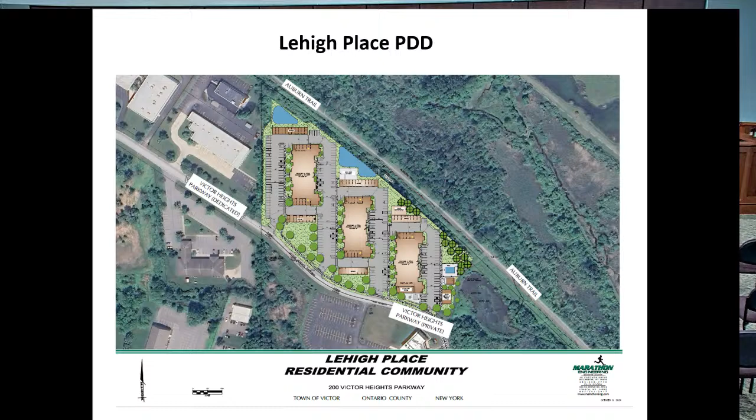I really don't have anything I'd like to point out in this updated draft. Has anybody had an opportunity to take a look at it, and do you have any questions? I had an opportunity to take a look at it, and I thought it was very well done. The two things that jumped out at me were the information you got from the school district, that they were rebuilding and running out of room. That's the first time I've seen any type of communication from the school about what we suspected, and I appreciate you including that.

And then the other part you included was that the density wasn't necessarily locked in to the 156 or whatever the magic number is. We still think that's negotiable, because I still come back to PDD being more like an HDD, a high-density development. It begs the question in my mind, why do we have multiple dwelling zoning when obviously if you're a developer, you're going to go for a PDD and try to get the most that you possibly can. But I think density is still, for me anyway, up in the air.

Still a concern, is that what you're saying? Yeah, it's a concern. Okay, Ernie? Well, Al had a comment last time about the school district's position, and I suspect that's because his wife is a teacher, and we're helping to fund a $100 million expansion. I'd like to hear what you have to say. Well, first of all, I did read Wes's draft and I'm fully supportive of what you've documented.

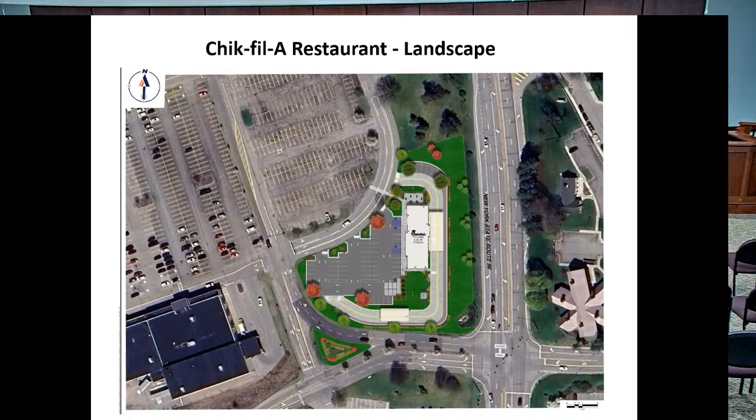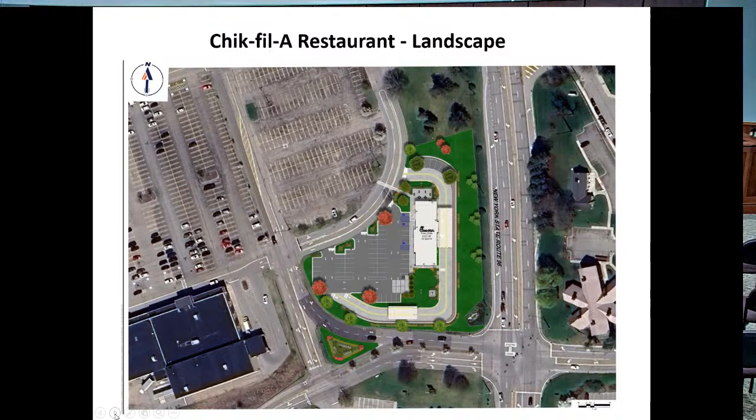Since that time, what we've done is spend a lot of time really trying to enhance the materials to better present our project. Just a quick summary: we've provided a landscape plan, a colored plan of the landscaping, and a grading plan so the board can have a better sense of the elevation differences related to this project in relation to the road and down to the mall level. And then we've provided some 3D renderings.

I'm thinking that probably the best plan to put up would be the color landscape plan, and I can use that for a lot of the discussion. Perfect, thank you.

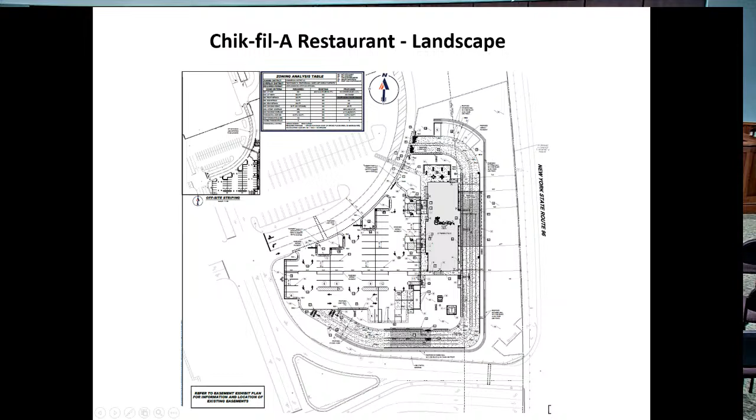So when we were here back in February, what we walked away with was really three items. Let me back up. What we heard was that this board is supportive of having Chick-fil-A in the town of Victor. The board wasn't necessarily crazy about this location, and we had talked about other sites. The three main points we walked away with were green space, traffic, and architectural design.

So I'm just going to start with the green space. The existing mall, I'm not going to spend a lot of time on the detail, but currently the mall green space is 64.6 acres approximately, representing 34.6% green space. This project would reduce the green space, or increase the impervious area, by about 1.08 acres. That would put us in need of a variance, changing that percentage overall to about 34% versus 34.6%. The last project that came in front of the zoning board in the town was the LL Bean project, which changed that green space to the 34.6% it is today.

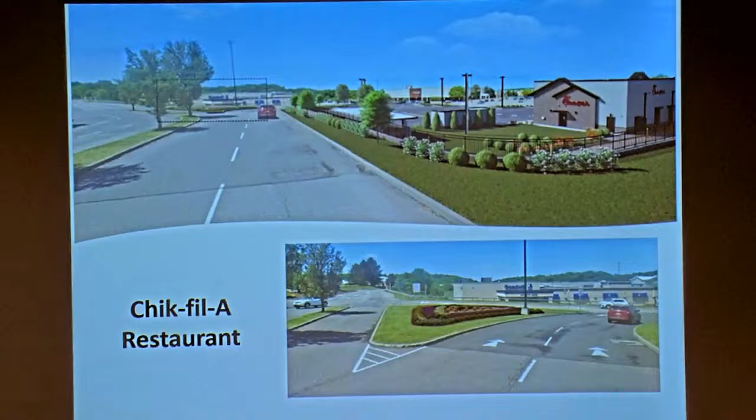The other change—if you can go back to the colored landscape plan—is proposed making this a 4-way stop versus a 3-way stop. Currently this westbound approach is free-flowing. We're proposing to make it a 4-way stop just to improve the safety of that intersection.

I disagree with that approach. The only way you avoid cars backing up into Route 96 is to keep that free-flowing into the mall. I don't think a stop would make it any safer, other than catching people who might make an error pulling through from the Macy's approach onto the ring road. I know the traffic—our engineers looked at that stacking and didn't have any concerns with what you're referencing.

There are times when cars are coming in, either crossing over from what used to be North Face, or making right turns once it clears out. If you start having conflicts by making cars stop there and alternate with cars coming out and turning left, it's going to back up very quickly—there's no queuing room, no queue space for that. That's what Scott said better than I did. We can take another look at that.

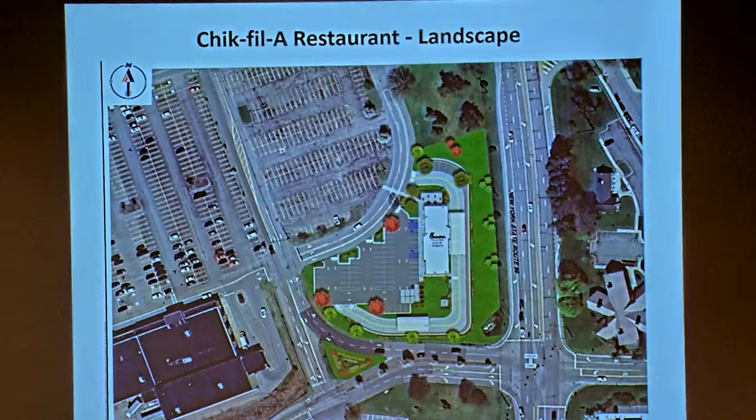And then if you could probably just go back to the building elevation, please.

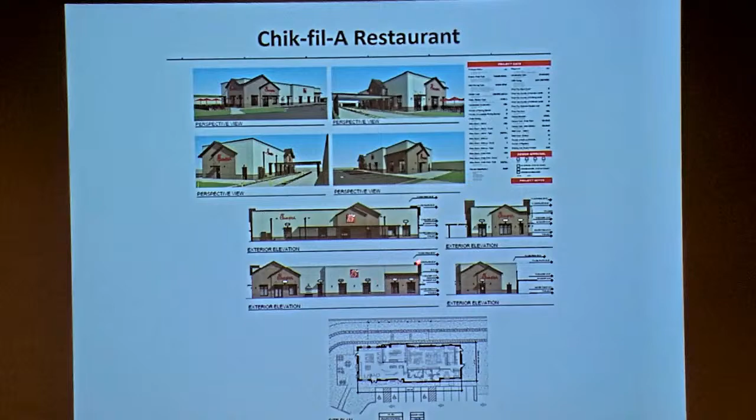So what we propose here is a custom design for this location. There is nothing prototypical about this. We've made the building taller, which we were always planning on doing regardless of the facade design, but the main parapet wall here is about 23'6", and the highest peak is 28'6". The materials on the building would be HardiePlank siding. We've created some steps in the building, and the brown you see is a cultured stone that would be around all the entry points, with a stone wainscot, and we've created these gable areas at the entry points on all 4 sides of the building.

And the bronze of the gable areas matches the bronze of the canopy, and matches the canopies over the windows, which is a little hard to see on that view. You might see it better if we jump to the 3D rendering from the parking lot.

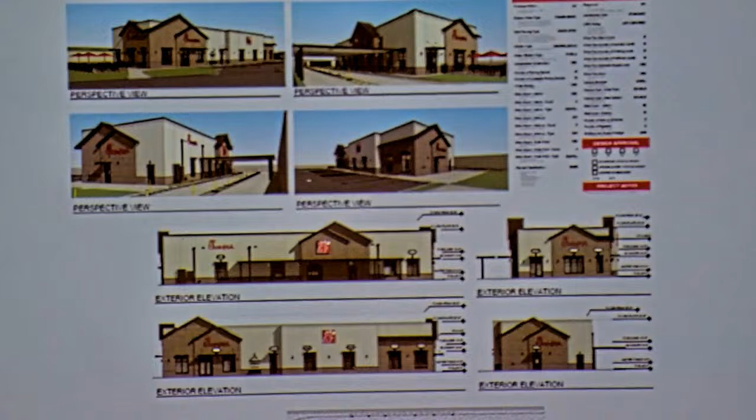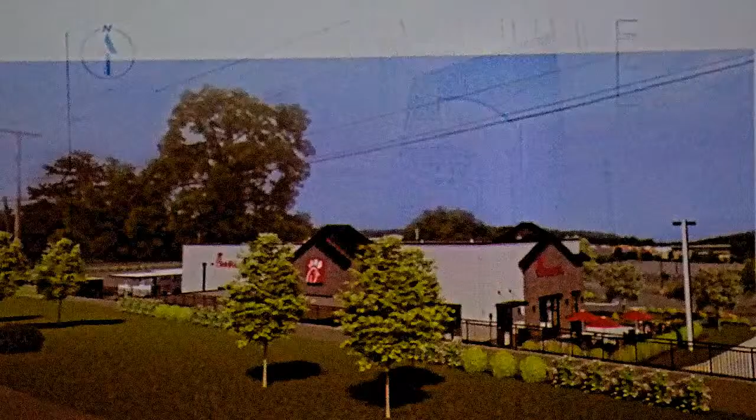If you go to the 3D rendering, there's a view from the parking lot, Chick-fil-A parking lot. Keep going, maybe it was that last one. Yes, go up one more, that lower picture. Right there. I guess it's still a little hard to see, but there are canopies over these windows and over the entryways.

Again, this is a custom design that the architectural team has come up with. We think this fits nicely. Across the street there are a lot of different architectural designs, the mall is a different architectural design, and this just seems like a nice transition between the two.

And again, we listened to the board, we brought this in, we've made a lot of changes. We're here to work with the board, and tonight we're informal, so we're looking for the board's feedback on the information we submitted.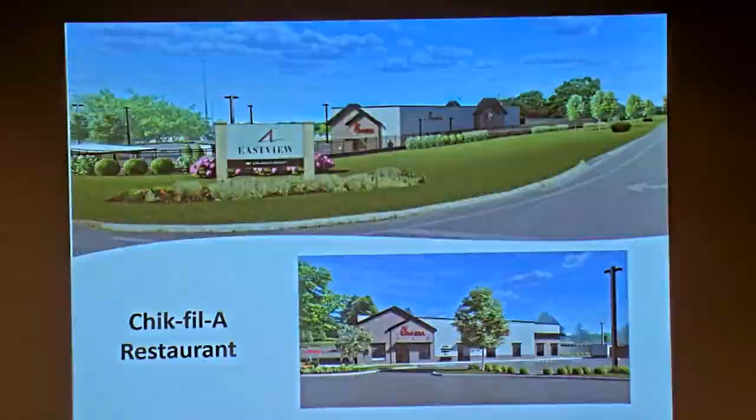So I like the changes you've made architecturally, I think it's much improved. We did talk about other sites, and I am curious, again my concern is clearly the entrance area there. We talked about moving this as little as 100 feet to the north to preserve more of that look at the entrance. I understand there may be some issue with Macy's having dibs on that parking lot space, but can you talk about siting it where it is rather than moving it around a little? Are you talking about putting it actually in the parking lot that's there now?

Moving it 100 feet to the north. I'm looking at a plan up there, Joe... so looking the other way, straight up, just move it straight up. So leaving all the green space, but putting it in the parking lot? Is that what I'm hearing? Just slide the whole thing 100 feet north.

And I think that would mitigate some of the traffic coming into the mall, making that right-hand turn into the Chick-fil-A parking lot, too.

Well, the answer to that is it's not that easy, because of tenant restrictions and lease agreements, as far as taking those spaces away. A majority of the year they're not used, but certainly in the holiday season they are used. This project, as it stands, requires a parking variance. I think anything you bring into the mall is going to likely require a parking variance.

I'm at the mall maybe 4 times a week for the past 40 years, and people behave real badly at that entrance to the mall. And it gets worse between now and Christmas, people behave really badly. I'm not sure that, even given the thought you've put into this, that's going to be significantly improved over the way they behave now.

Yeah, and then I do want to, you touched on it, because when we were here last time we did talk about other sites along the corridor. There was some sites mentioned. The Chick-fil-A team has looked at this, and there really is no other viable sites in this 96 corridor.

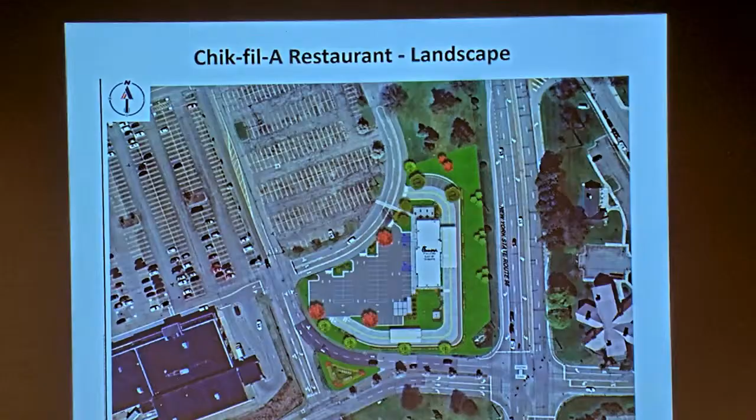I guess my take on the discussion is that when it comes down to green space, you've got green space at Eastview Mall that encompasses the entire perimeter of the mall, including the stormwater ponds and that sort of thing. And I think this is really high-value green space comparatively, and I think that's the point I was trying to make last time you were here, which is why I don't think this is the right location, because of that, and wanting to preserve that, because it is subject to those traffic issues that we mentioned before, and I don't see those improving. Maybe the DOT wants to change the light by 2 seconds. That's fine. I don't think that's going to do the trick.

I guess for us planning board members and residents of the town who use this area quite frequently, I think we all know this is a very busy area. It is exactly as described. I don't see a traffic engineer really surpassing the experience and knowledge that we have as planning board members on this. You can tell me again and again that your traffic engineer looked at this and we changed the traffic signal 2 seconds, but

I don't buy it. All I can say is our traffic engineer has a history here. They did the traffic study for the Walmart project, so they do have a lot of history here. They understand what you're explaining. They know what it is, but the numbers, we looked at, we took counts. We have those numbers. We know what the level of services are. Chick-fil-A is a lot of pass-by traffic. Yes, we are generating new trips, but the chart at the end of the day, the level of service chart tells us what's happening.

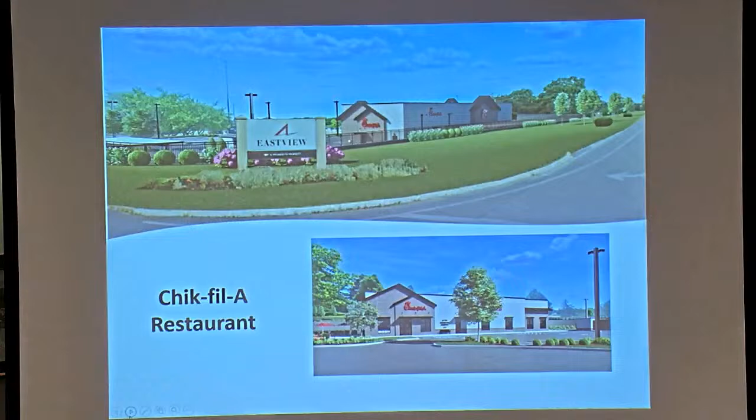There's that one right there. So that's looking up 96, is that right? Yeah, that's looking northwest. And so is that topography and everything to scale then, to the extent that that building is going to be protruding up that far from the grade at the street?

I don't know if there's probably more grade drop than that is depicting. But the building, the elevation change from the roadway to the parking lot is about 17 feet. That building, the top of the HardiePlank, I'll call it the parapet wall, is 23 feet. And then the top of those gables are as high as 28 feet 6 inches. So yeah, it will project. You won't see the drive-through canopy, that's in between the building and the wall, about 10 feet. So that'll be basically at the top of the wall.

Why does the building have to be that tall? We think it's important for visibility. Visibility. Yeah, I thought. Okay. Yeah, I mean, if the building is standard height, the signs are going to be half cut off. What does Wilmorite have to say about this?

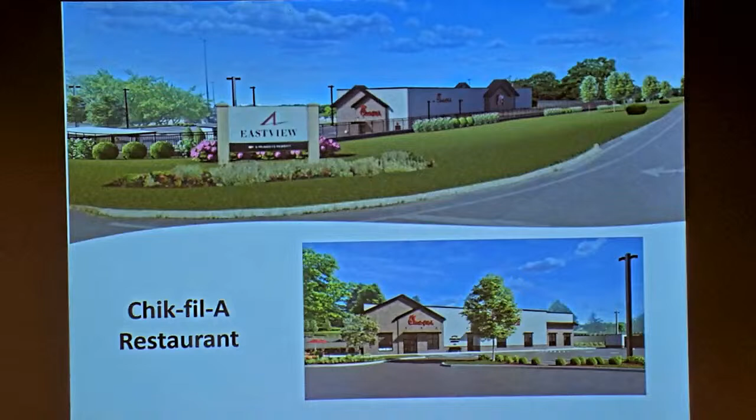Good evening. John Dower, head of leasing for Wilmorite. My job is to keep the project filled with great tenants and have a great spot for the community to go. I've been working with Chick-fil-A this is 3 years on this, from the beginning of talking with them. Great company, very great to work with.

I think what I'm most excited about with this is the habitual nature of people, and the more times we can bring them onto our site, the more chances that they go into the project, or when they're leaving the project, go here. And as we all know from our shopping experiences, changing those habitual drive patterns is important. I think they're probably one of the few tenants that can really add value to the overall asset in that particular spot. Certainly understand some of the points.

And we will be adding more green space. We've heard and listened and understand that. And as we develop more areas that are on pavement only, like we have preliminary discussions about a hotel, that'll be adding a lot more green space around that as well. And certainly going to be in the overall planning as we go along. But this is important to the overall development and continued keeping it viable and keeping our competitive advantage over our neighbors for shopping centers, not in the Victor area, but east and west of us in neighboring cities.

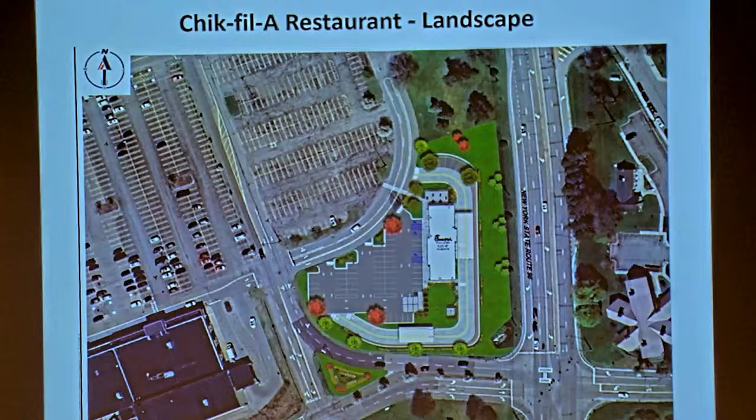The architecture I was referring to, ones across the street. You've got Allentown right there, so we don't want to take away from that. I know you're talking about the mall and all, but if you look at Wendy's down the road, for instance, that's a complete building, all brick, nice pitched roofs.

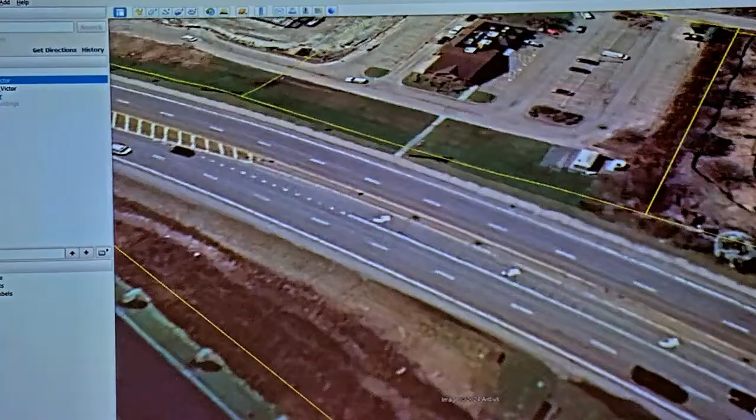Yeah, so that was pretty unique. It was sort of a massing of barns concept, and I think Rinaldi did a beautiful job with that building, and some of the other ones that are there too. So just look at Beer Project. That would go a long way, I think, to making it fit within that corner.

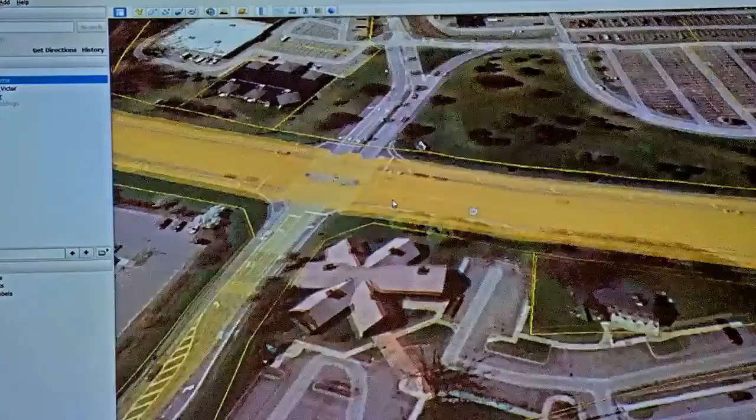Yeah, and there's a lot of different stuff there, so we will take another look at it. Sometimes you don't know what pieces you're looking for, because those all look a little bit different.

You look at not just North Face, but even beyond the buildings, take architectural examples from the village of Victor and through the town, that type and style. It doesn't have to be Chick-fil-A, but you look across to City Mattress, that's arts and crafts in a building, not just tack-on facade pieces.

Understood. So I think that's kind of what we would expect in that location. Can you shoot across behind it, New York Beer Project?

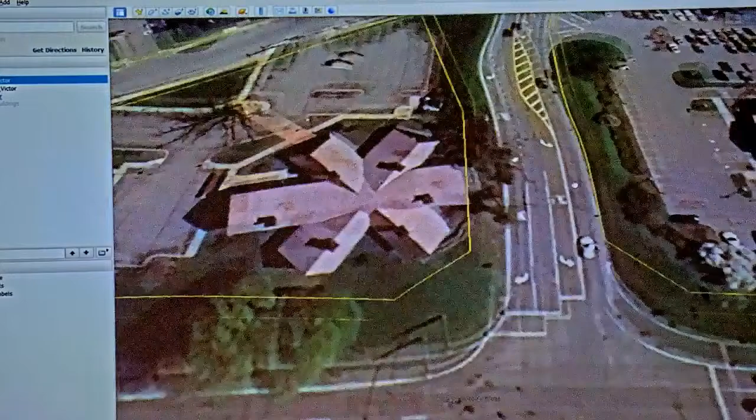You had a beer yet over at the project? I have not. You should go to that building. My wife has, it's beautiful, but I have not.

Burgers are good. So that's an old, obviously old industrial look type thing, and Dave Hanlon did a beautiful job on a lot of this stuff, so yeah, that's pretty upscale architecture.

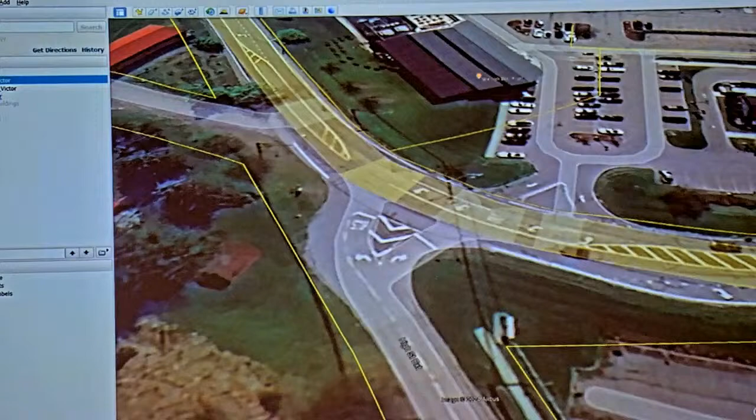But again, it's the historic district, that's why it's there, and you're reflecting that, and I think those are the comments that City Mattress got as well when they came in for their building, it can't just be a box. Right, so, even the bank right across the street too.

Yeah, Chase, yeah, that was gonna be a box, not for very long. It became a more attractive building. I think that's helpful. I think the board had said we've taken a step in the right direction, but there's more work to do there.

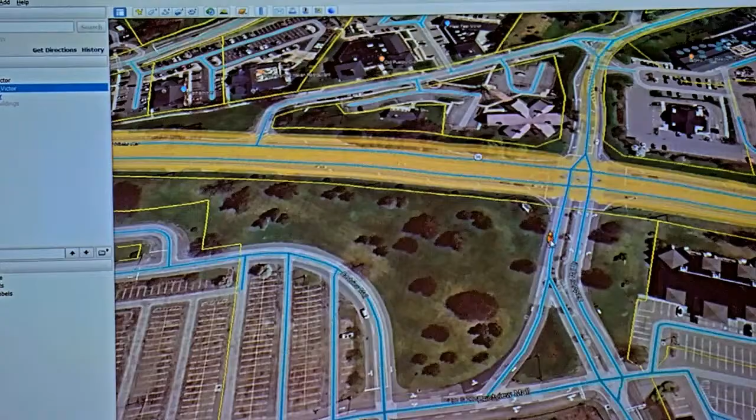So, doing a better job enhancing the green space, trying to retain stuff. I know those big trees are set pretty far back. I'm looking at the local street view right now, they're pretty far away from the road, so you're probably right in the middle of your wall or something. Yeah, we have an overlay of that we can take a look at.

Yeah, most of those, as you can imagine, will not be able to be saved. I mean, these are street trees that can stay, but as soon as you get into the middle of the site, all of those have to be gone for your layout to work.

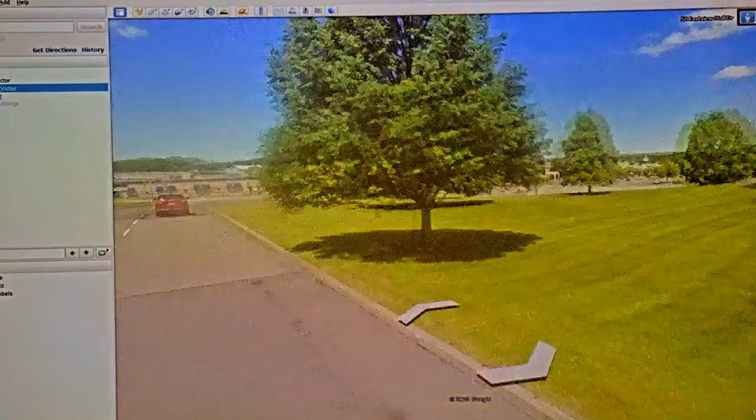Reconstructing with some forest, so it sounds like maybe there's a preference to replace some of the deciduous trees we have with more mature evergreens. I don't know what the largest size you could replant there would be, but maintaining that feel, something bigger than 6 feet would be a good start.

Okay, so we seem to have wandered back a little bit towards accepting the site with some enhancements instead of not wanting it at all at that location. Am I hearing that from you guys? Well, I think what we heard is that's the only site that will work for Chick-fil-A. So let's tweak it so it maintains some of the character we're seeing there now. I'm trying to give them feedback more than just what we'd prefer.

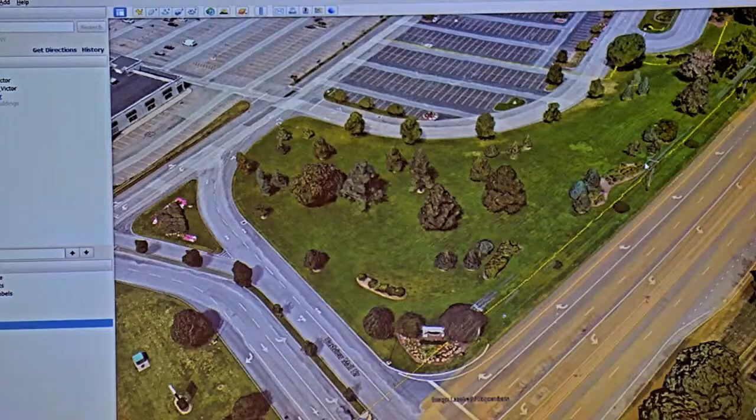Okay, sounds like it's been going on for a couple of years already. So we're talking about this strip right here, I think that looks like it could be available to work with, and then taking this intersection and moving it back just a bit, but that doesn't line up with this, so you'd have an offset intersection, right? Yes, I don't know how that works, but certainly we'd appreciate looking at it a little more in depth.

I'm trying to guide this a little bit, but I want to hear. You're doing great. You should have heard me before we started this meeting, you may not have recognized the conversation.

Anything else from you guys on the board? Wes, any comments at all? You're here for the ride? Yeah, I guess we'll be interested to see what you come back with.